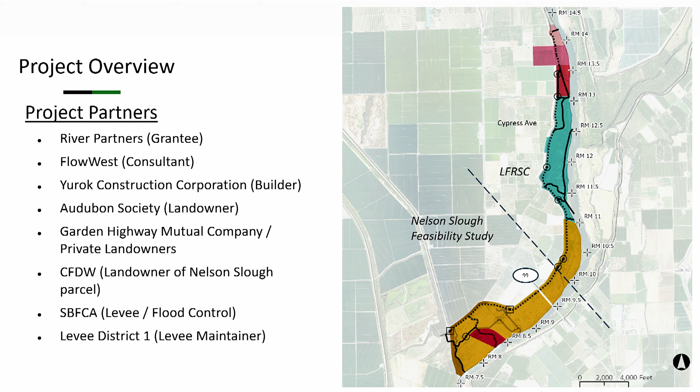So about the funding. Initially, well, I'll do the second funding at the bottom because that's what we got first. Bureau of Reclamation through their Central Valley Project Improvement Act, CVPIA, provided funding of $10 million for a period from about 2025 to 2028 with a possible extension, we'll see. And that's funding project planning on the entire footprint.

By planning, I mean conceiving of what could be possible, doing outreach with landowners, seeing what could be advanced. And then design, permitting, and construction of a side channel project on some portion of the footprint that comes out of that planning exercise and goes forward. And that could be some combination of actions on the Audubon parcel, which is where we've been focusing mostly, in some of the private parcels potentially, and or down on the CDFW property.

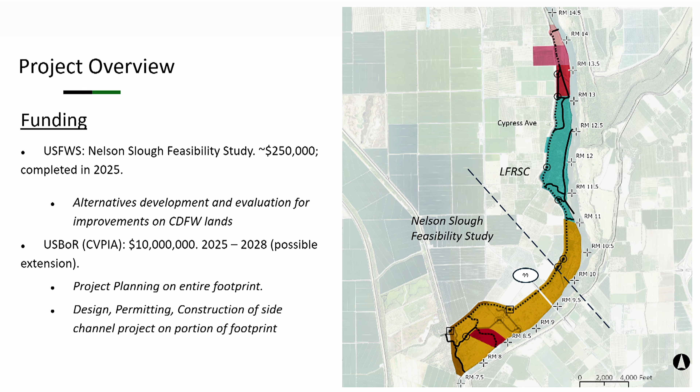And in the aftermath, if the planning portion of the work finds that we can implement something throughout, then it will be constructed in phases. Subsequent to that reclamation grant, we also got a grant from Fish and Wildlife Service for a project called the Nelson Slough Feasibility Study, which was a pointed feasibility study on what could be done on CDFW's lands in the yellow area. That was a $250,000 grant, and that work was completed in 2025. It funded alternatives development and evaluation only on the CDFW lands in yellow.

Michael mentioned a couple projects, so I wanted to quickly differentiate, because I think there are 2 projects being called the Lower Feather River Side Channel Project right now. One spearheaded by the Sutter County RCD, very tiny up there in purple, so I have the arrow pointing out where that one is. That's not what I'm talking about today. What I'm talking about today is the River Partners one in orange that you've already seen, that footprint down below.

Obviously, they're very different size scales when you put them together like this, but they're both important projects for creating salmon habitat in the Lower Feather River corridor. And FlowWest is actually working on the designs of both, although, as I said, today I'm focusing on the orange one with River Partners.

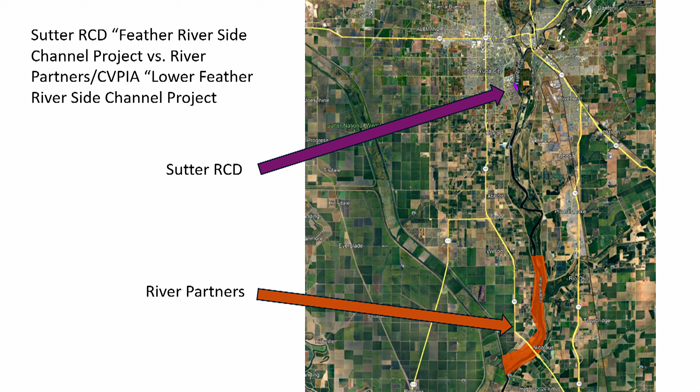So a little about why this project is important and the basis for it. You don't have to worry about that paragraph on top, but suffice it to say at the bottom, CVPIA, Central Valley Project Improvement Act, has put forth near-term restoration strategies, or NTRS, actions for regaining salmon populations in the Central Valley. And one of the priority actions that came out of CVPIA number 8 is action on the Lower Feather River and doing juvenile salmon habitat restoration below the confluence of the Yuba.

So this is a priority area, and for River Partners, it's part of a coordinated strategy where they're already doing work in yellow at the Goose Club and have done work in blue on Dos Rios Norte, and this Nelson Slough unit in pink and the rest of our planning area in green is completely contiguous. So if projects were implemented throughout, there would be this very long corridor that helps juvenile salmon as they're making their way out downstream, able to find the habitat that they need.

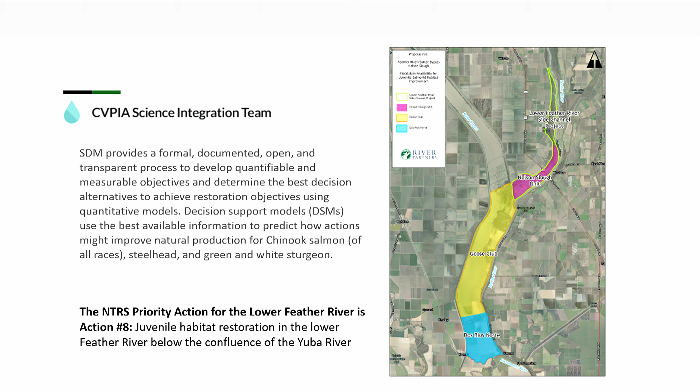A little more about the project basis for this specific project. As you probably know, declining salmon populations need shallow, slow-moving floodplain areas for the juveniles to feed and grow, and those are in short supply. The Feather River corridor, particularly in the area that we're looking at, already contains numerous low-lying and wet areas that could support salmon rearing. These include remnant channels, levee borrow pit or channel, because it's very linear in this area, and other features like that.

So the goal of the project is to help expand some of those areas to have more frequent flow through them and better connections to the Feather River so that the salmon can get in and out of them as waters come up and recede. So a summary of the goals and possible benefits of the project. We're looking to restore river processes and connectivity to the Feather River floodplain, increase the amount of suitable rearing habitat for juvenile salmon, and increase early successional riparian habitat for native wildlife of all kinds in the corridor.

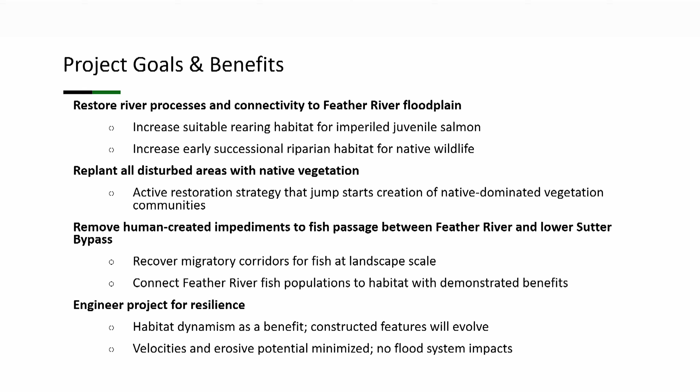Okay, a little bit quickly about timeline and status. As I said earlier, the Nelson Slough feasibility study we completed in 2025, specific to the CDFW parcel. Throughout 2025, we were doing data collection and development of a hydraulic model for the project. We began alternatives outreach and preliminary design. That's continuing into this year. Permitting will take place in '26 and '27. Engineering design, we're currently embroiled in and will probably go into next year. And then construction of a first phase, we anticipate in something like 2028.

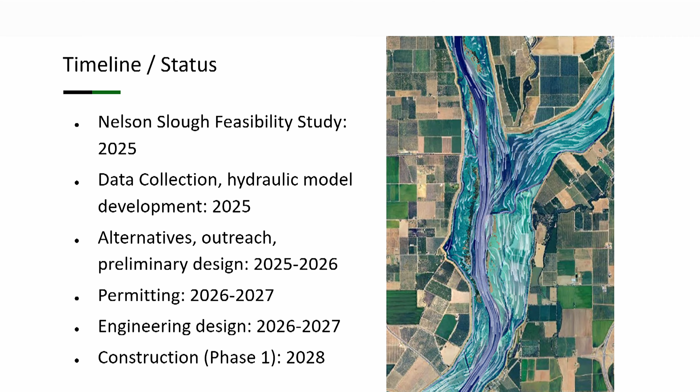All right, so now I'll run through the work that we've completed to date with some examples of more specifics of what the project would look like. As I said, we've completed the Nelson Slough feasibility study. We did a new survey of both topography and bathymetry in the planning area. You can see an elevation model of that on the right. We used that to develop a new hydraulic computer model of this section of the Feather River and a little bit of the Sutter bypass.

We've developed alternatives for each of the three zones and have started evaluating them. That's still ongoing. We've been conducting stakeholder and technical advisory committee outreach, which included SBFCA, on the project and its alternatives and what we're proposing. We've developed conceptual designs, and we've done both hydraulics and habitat suitability evaluations. The juvenile salmon need very specific ranges of depths and velocities for their growth, and so identifying and quantifying how many acres of that type of suitable habitat we will create is part of what we need to do to satisfy grant requirements.

So first, a bit about the project hydrology and what kind of flows in the Feather River the project is really meant to target or create these interactions. So we're definitely looking at low flows, not flood flows, because we want flows that are happening every year, and in some cases every year for weeks at a time when the juvenile salmon need this habitat. So we've generally looked at kind of what flows are occurring for at least a 2 to 6 week duration each year in January to March.

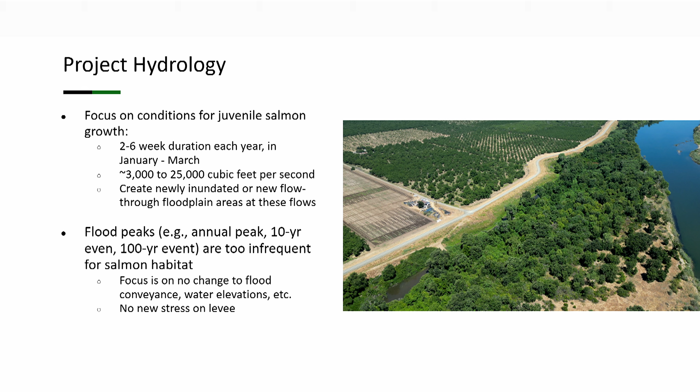Okay, so this is the Audubon parcel. What I've been describing as the Borrow Channel is this kind of a feature along here. So we're looking to deepen that and widen it a little bit to the east. And then also in Sand Spit Slough, which is an existing kind of remnant channel in the floodplain, expand that one and create some higher and lower flow interconnected channels between the Feather River and that Borrow Channel.

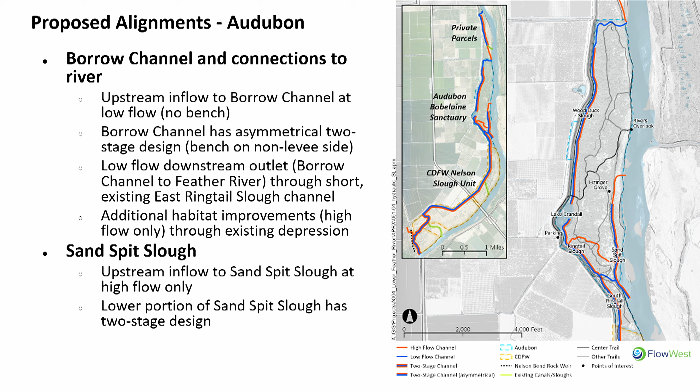And then down at the CDFW Nelson Slough unit, it's somewhat similar where that kind of levee borrow channel exists with some deepening that we would do and expansion to the east. And then creating in an existing remnant channel depression a much deeper connection that brings water from the Feather River up toward this rock weir where we would put a notch that allows the fish to get over easier into the Sutter Bypass where there's already a lot of existing habitat for them. We've done a lot less, let's say, on the parcels to the north, the privately owned ones, which is why I don't have figures of those yet today, but we're working on that this year.

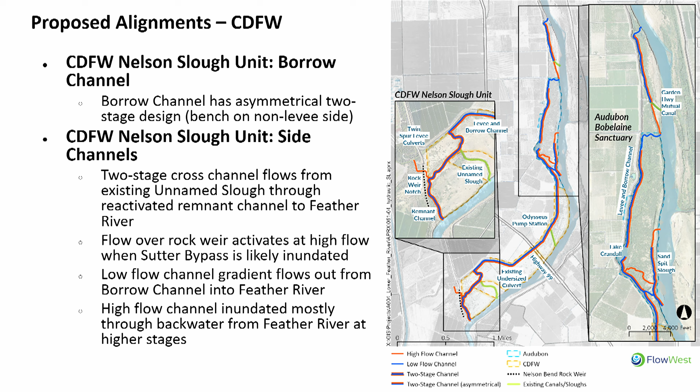So sort of just to give you a sense of what this looks like, I have a rough cross section. If you're looking here, looking downstream, and your western levee is up here, and its toe is down here, this depression is that borrow pit that I'm talking about. And so what we're proposing to do is off of the toe, not into the toe, cutting deeper and creating kind of a ledge to the east, and then meeting up with existing terrain. And so by digging down and creating kind of this terrace here, we have the ability to create the depths and velocities that the fish need at multiple flow events in that depressed area.

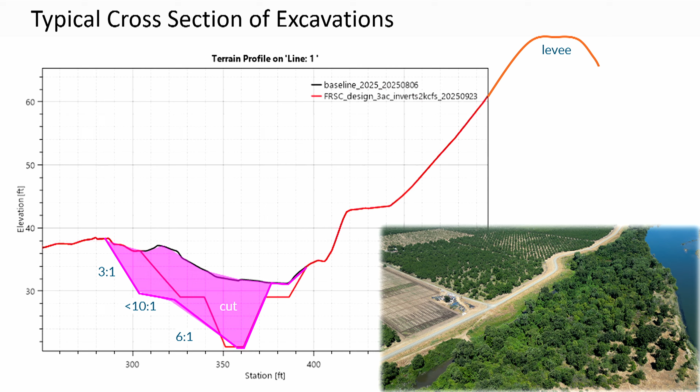So I wanted to talk a little bit about the hydraulics analysis we've done and kind of show you what preliminary results we have and what changes to expect in the river itself. It's not very much. So first you're gonna see a series of 3 slides looking at 3 different flow events. First, we're starting with what I'm calling an annual event. So sort of on a statistical average, the largest event you'd see in a given year.

For velocities, again, in these channels that we create or deepen, we see some marginal velocity increases, around a foot per second or so, but very minimal. And you can see in this blow up over here that those are in the middle of the channel, and there's still functionally a dark blue no change of velocity where it touches the levee. Yeah, got a question? Great question. It is, I believe, approximately 80, 90,000 CFS, I believe. Yeah.

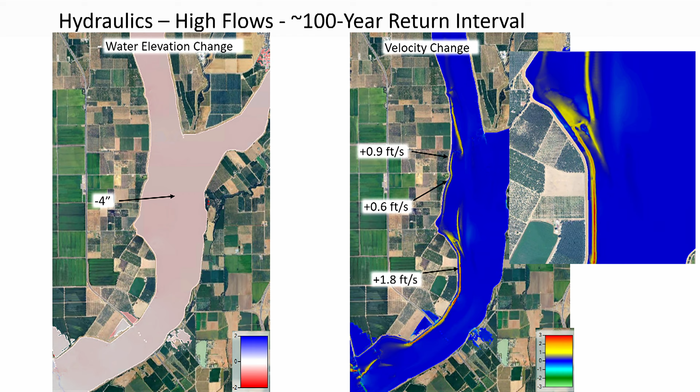And then for the 100-year, which is close to 400,000 CFS, it's a very big flow. It's more of the same, although slightly diminished on the velocities in particular. But again, we predict about a 4-inch drop in water surface. And, let's say between fractions of a foot per second and 2 feet per second increases out in the areas where we've excavated channels. So very minimal predicted changes to the floodway. Really only out in the floodplain where we do our work and not in the actual river corridor itself.

This slide just gets at our most recent work looking at the Audubon Reserve, where we have kind of a map of our proposed channel features over here. And the bar charts are sort of showing above and below in different regions our projections of how many new acres of suitable salmon rearing habitat there would be. And apologies, this is actually for all 3 regions of the project, the private parcels up in the north, the Audubon in the middle, and the CDFW in the south. So the numbers are kind of irrelevant for today's purposes, but just showing that the proposed condition results in significant increases in suitable habitat for these salmon during their rearing season.

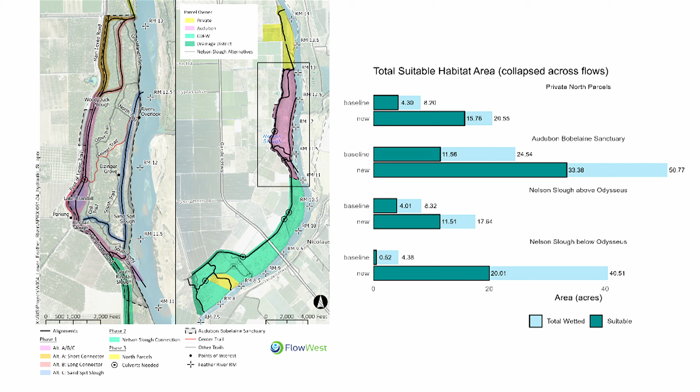I think that brings me to basically the end. Next steps during 2026, we're working, accidentally pushed the button, would you mind bringing me back one? Thank you. 2026, we're working on continued design and refinement of the designs, continued ongoing stakeholder outreach, 30 and 60% designs on as many of the parcels as we can do, and moving into permitting, targeting, as I said, a first phase of construction, probably on the Audubon parcel in 2028.

You get all this built with a grant, and then going forward, who maintains this channel you're going to create? The channel's being designed such that it shouldn't need ongoing maintenance, that it will evolve with. So it's not going to need any ongoing maintenance in flood time? No. River Partners as the sort of project owner and working with landowners whose land it's on may come to some agreement of what level of interaction they might have to do that.

But the goal is that we're building habitats that naturally will evolve with different years' flooding patterns, and that even with some degree, let's say, of sedimentation over time, these side channels are designed to evolve. Natural ones that provide this habitat are formed, fill in with sediment, disappear, return over the long term, and we're looking for the same type of evolution of a habitat that we create, because the goal is not to have people out there needing to constantly re-excavate these channels over time.

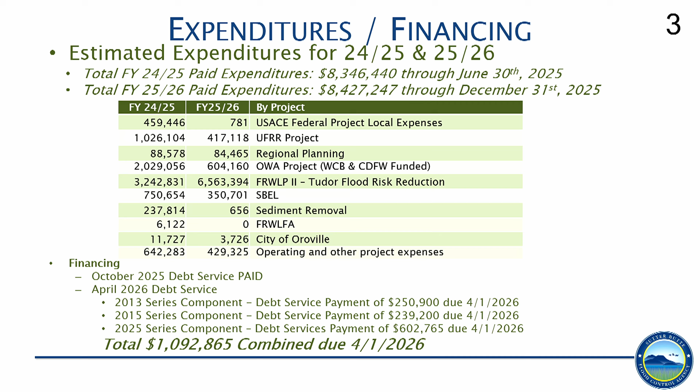Our debt service payment is coming up in April, a combined $1.1 million that we're planning to make. Can you go back? Thanks, perfect. So going forward, continue activities. We have some closeout on a few grants. Our FMPRA grant was closed officially on December 31st. We have a CDFW grant that's closing out in the middle of March. And then just administration of ongoing grants.

And then next month, we'll present the audit. Continuing disclosure report on our debt service is also due in March. We have an assessment roll for 26-27, with a kickoff meeting with advisors at the end of this month. And then just our budget process. We have a preliminary budget probably set for May, and a finalized version in June. So I'll open up for any questions. Any questions from the public? Any questions from the board? Thank you. Thanks for your time. Mike, I'll throw it back to you.

Okay, Mr. Chairman, we have now our last presentation of the day. This is mine, the program project update. Let's pull that up here. Every year at the beginning of the year, I like to look back and talk about our successes from last year, and then look forward to what we're trying to achieve in this coming year. So for 2025 successes, we awarded our construction contract for the Tudor Flood Risk Reduction Project, we broke ground in May, we started season 1 last year, and we'll be proceeding into season 2 this coming year.

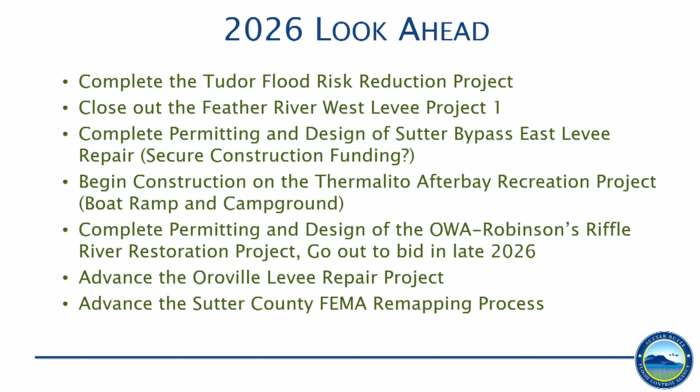And then these last two items are more just ongoing advancement of the Oroville levee repair project, looking for future funding sources to assist the city of Oroville. And then also advancing our Sutter County FEMA remapping process. We're, I think, in year 2, and it probably is looking like another year or so before we complete that process. And with the uncertainties of the FEMA administration right now, we're not sure exactly where that's going to go and what that timeline will look like.

Next slide, please. Okay, so let me get into Tudor Flood Risk Reduction Project. We're entering year 2 of our construction. Last year we completed all the levee improvements, the cutoff wall construction. This year our contractor's coming back and putting in the 2 pipes that need to be installed. We anticipate beginning construction in probably early May. We might be out there a little sooner doing some dewatering work and getting ready for being able to degrade the levee, but obviously we won't allow the contractor to proceed until it's safe to do so. So that'll all depend on how the rest of the flood season goes.

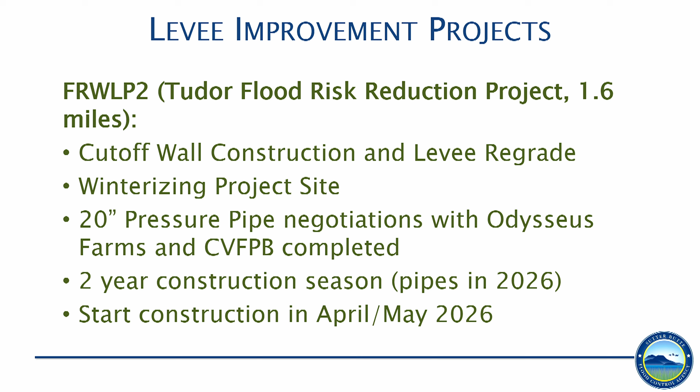Next slide, please. Okay, Sutter Bypass East levee repairs. We received our Army Corps comments on our 90% design, so our team is addressing those now, and we'll be advancing towards 100% submittal package in the spring, and then getting that process ready to when we find construction funds going out to bid on that project.

So what we're doing right now, we're working closely with Cal OES and their consultant to put in a hazard mitigation grant application to FEMA. As the board's aware, we were successful in the BRIC grant, but that has been pulled away by the Trump administration. So we're pivoting over to HMGP. So we're getting close to finalizing that application, and Cal OES will be submitting that on ours and the DWR's behalf to FEMA in the spring. We're also closely coordinating with Calpine on their future expansion to their Sutter Energy facility and possible funding for advancing our repairs to the Sutter Bypass.

On City of Oroville levee repair, the Army Corps gave a presentation to the City Council on February 3rd, and Chris and I were in attendance there. The City Council asked a lot of good questions to the Corps. I think that study overall was well received, and there were some good action items, recommendations in that report that will be helping the city advance this coming year. We're also going to work closely with Senator Dahle and Assemblyman Gallagher, who is now potentially moving on to Congress, to look for state funding to help the city.

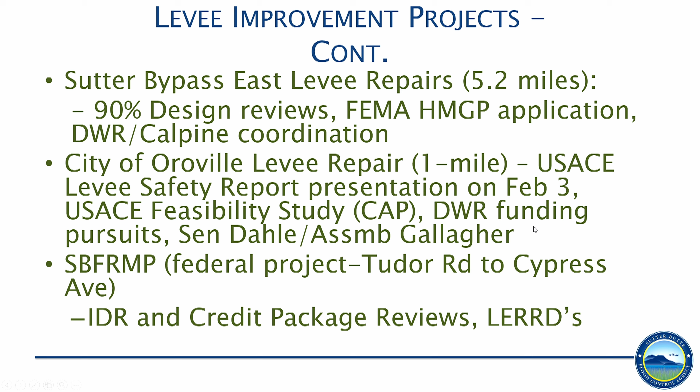And that one's also similar to what Paul was talking about earlier. We're creating side channels up in the Oroville Wildlife Area, improving the actual riverbed for migrating and spawning salmon. So all of these projects are sort of interrelated to help the salmon species thrive in the Feather River.

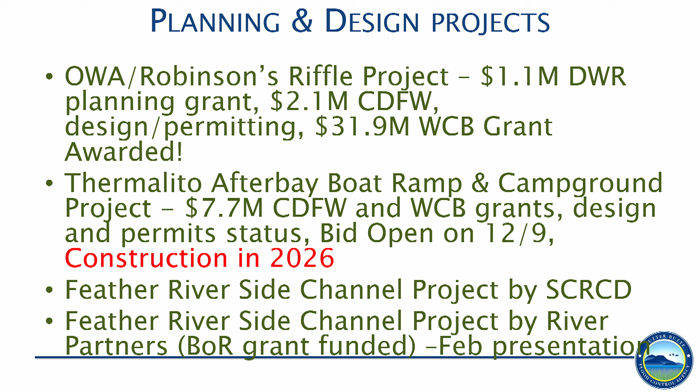And then the last two bullets are all the side channel projects we just talked about, so I won't go over that again. Next slide, please.

Okay, upcoming meetings. So another Army Corps levee inspection took place in January. So the Corps every 5 years does their risk assessments and periodic inspections of levees throughout the federal system. And ours was done this January. So we participated all along the Feather River and along the Sutter Bypass East Levee. It was like a 2 to 3 day field work, and then 2 to 3 days of in-office

analysis, and the Corps is going to follow that up next week with some additional meetings that we'll be participating in, just to ensure that they are evaluating our system properly and accounting for all the improvements that we've made. And so it's a really good process that we're partnering with the Army Corps on.